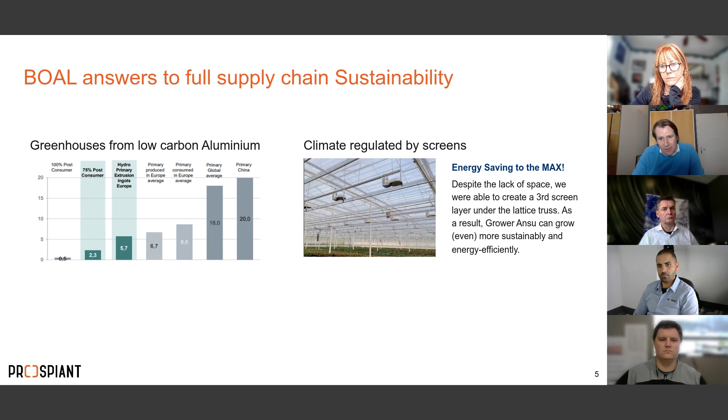That's from the aluminum perspective, but from the perspective of a grower, energy is costly, and we try to see how we can change that. For example, where growers start with one screen, it's very common in the Netherlands to have a second screen, but now we're already talking about growers who have 3 screens, and by that they are really lowering their energy consumption. If you go to the next screen.

But also getting the pesticides out, which is a challenge. We have our netting system, but people will say the netting system also has some disadvantages. So we're really looking at a way and a type of growing how we can overcome these disadvantages and get it growing in such a way that with the netting and without pesticides we have a really good yield.

So those options and this way of thinking really gets you to a position where every time you say, hey, where can I improve? How can I provide to my customer? Prospiant is one of our biggest customers, a good product which really is sustainable. Traditionally we use glass, but you also have ETFE foil, and that really reduces, for example, transport emissions. So we've been looking into that, and we think within a year we'll have a greener option for every product, which we can give to the market. So in that perspective, that's looking at where we can improve.

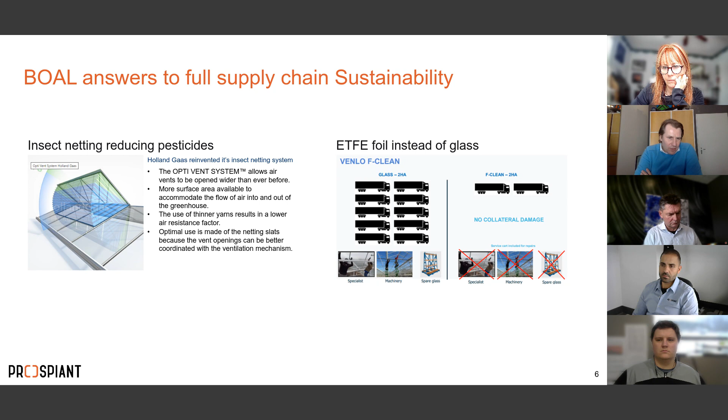How can we make the tomato or the cucumber more and more sustainable as well. That's our challenge, and also for all other things we're looking into, for example recycled input. We've got screens where we have recycled input without compromising the quality and functionality of the product, because that's really important. We also have our sandwich panels, designed so that no sealant is required. In that way, BOAL tries to, bit by bit, get the complete horticulture business more sustainable from its side.

So we really see this as the future in horticulture, that not only the product is sustainable, but also the greenhouses are. So if you've got any questions on it, I'm happy to answer.

And what you'll see is that more and more this is common practice. Like Nike has sneakers with recycled input, and also large car manufacturers do the seats, etc., with recycled input. So we believe that this will be the normal way of working in 5 to 10 years, that all products, or probably governments, will require a certain amount of recycled input in your products.

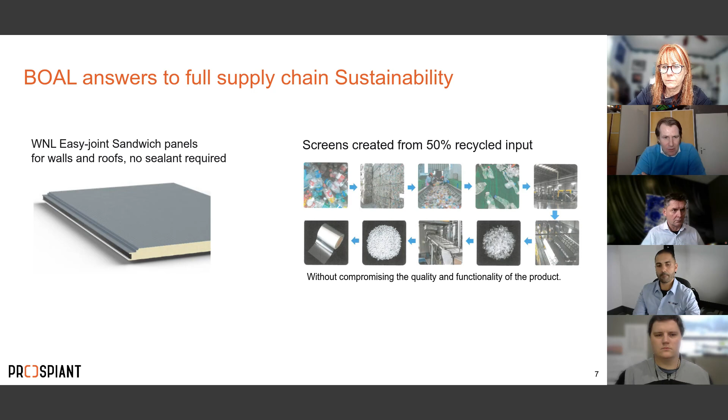So moving on to specifics about the actual greenhouse, we have Joe, who's going to speak to the next two slides. On a large-scale greenhouse project, you require what we call stormwater management or rainwater management. Essentially, when you have a large square footage of ground covered, you're going to have rain runoff from the roof when it rains in the area. So you have to control discharge into the local authority or the municipal drain.

And this water can get up, on a large scale project, to over 20 million liters of storage required. And then with water conservation in mind, it comes to mind, well, how can we use this water? How can we take advantage of this excess water? And that kind of leads into what we call a rainwater recapture system.

You can do this a couple ways. Typically how it's seen is you have a pumping station connecting to your stormwater pond, where the water will be filtered, sterilized, and then reused in the fertigation process. And then to further increase water quality in your pond, you can actually add a liner to your pond or cover your pond, and that'll control algae bloom as well.

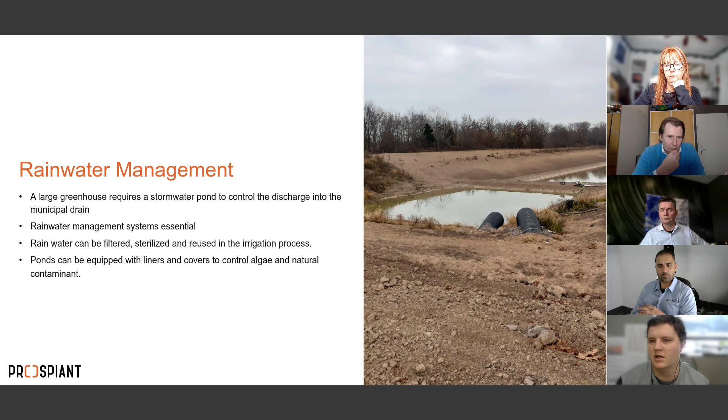And after talking about what happens to the water outside of the greenhouse, we also have to consider what happens to the water inside the greenhouse. Typically how that system is set up is you have fresh water, which in a typical greenhouse you can see up to 40,000 liters required per acre, which is quite substantial. So supplementing that fresh water that you need with the rainwater is obviously ideal.

In the typical process, the fresh water will feed a fertigation or injector unit, where that fertilized water is then transported to your plants through a drip irrigation system. The hydroponic gutter will collect what we call leachate after it's run through your plants. With that collected leachate, we pump it back through a particulate filter, then we can sterilize it and reuse it in that process, which can supplement your freshwater consumption and your fertilizer consumption, which is ideal for most growers.

So once the water comes in, it's a closed loop system, effectively. Exactly, essentially, yeah, so you can reuse both fertilizer and water.

So then it becomes kind of a combined venture with the fresh water and the sterilized leachate.

How many gallons are required per square foot? The freshwater consumption can be up to 40,000 liters per acre, but it usually doesn't exceed that number. Which is quite a high number, really. Yep, but if you consider the rainwater runoff, where you can see up to 20 million liters stored, you can see how it would be ideal to reuse that in the process.

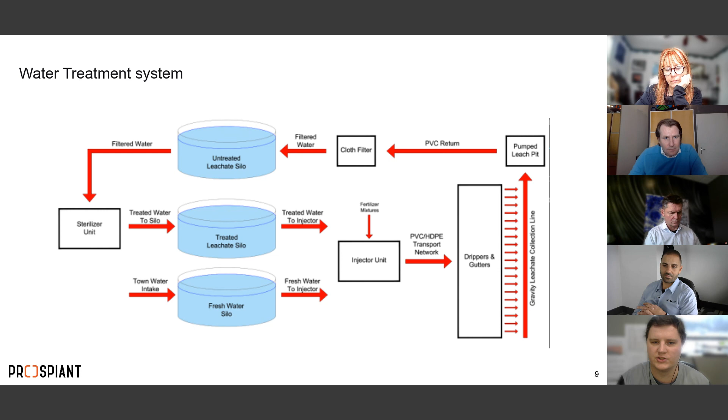And it's something that we've been exploring, and we've seen and done on a couple large scale projects, and it works very well.

On top of water, plants also require CO2, which is a very essential process in photosynthesis. To produce this CO2 in a large scale venture, you usually see it done via natural gas boilers. The issue arises when you need CO2 but you don't need heat, because when you run those boilers, you produce both heat and CO2.

So what we've done is we typically install a hot water storage tank on these projects. This allows us to produce our CO2, and then that heat, the hot water byproduct, you can store into a hot water storage tank, which can be used later when it's required. And since it's an insulated tank, it'll retain that heat a lot better. And how you can reuse that heat is by running it back through your boilers, where it requires less energy to get to the temperature required, or you can pump it directly to your range and use the heated water in your hydronic heat system.

What temperature does it store at? Typically 90 degrees Celsius, just around there. You can go a little bit hotter, but that's typically where you see it.

The key takeaway here is that the crop itself wants CO2. When the sun's out and the plant is wanting to be active, that CO2 uptake bursts from a photosynthesis perspective. So running your boilers to create hot water during the day isn't needed to keep the greenhouse warm, because it's warm outside and the greenhouse is already warm.

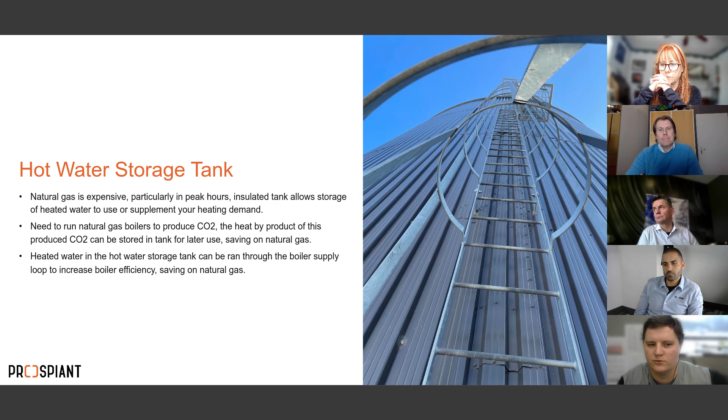That leads into the next topic, the CO2 collector. Essentially what we do here is set up an aluminum manifold that spans and connects to a CO2 condenser on the natural gas boiler. The CO2 condenser is there purely to increase the efficiency of the boiler, taking advantage of the flue gas heat.

But what this manifold lets you do is only need to run one boiler to produce CO2. So when you have times where your heat demand isn't in full flux but you have a CO2 demand, you can run a single boiler. It's not producing as much heat, but it is producing the CO2. On this manifold you have multiple CO2 blowers, used to distribute the CO2 into the range. So one boiler can feed multiple CO2 blowers, without producing as much waste heat going to the hot water storage tank for later use.

Are all greenhouses sustainable to some degree right now, or do some just have nothing? This is a general question, really.

Typically you do see some technologies that are green or taking advantage of what's there, especially when it's both economical and environmental, because it's a win-win situation. For example, a CO2 collector, if you have multiple boilers and blowers, is a great idea to have in. It's nice and green. You don't have to consume as much natural gas to produce your CO2. Same with the hot water storage tank, where you can produce CO2 without worrying about wasting your heat, where it's both economical and environmental for the grower and the operator of the facility.

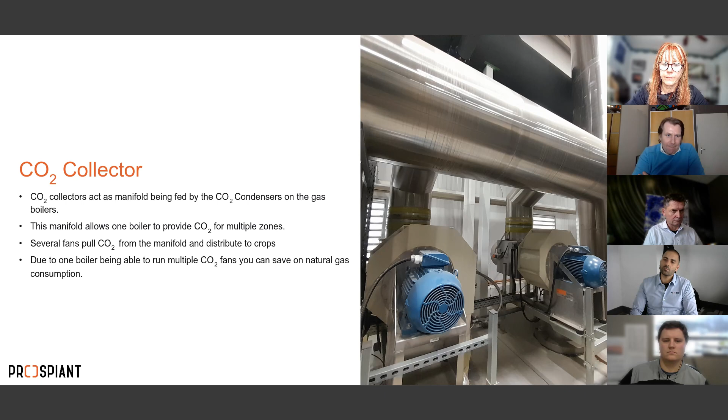Okay, my turn. So we talk about screening systems. We talk about shade systems. So climate screens, essentially we use them in a greenhouse to control humidity, temperature, and UV radiation. And the point of it is basically making the most optimal condition for you to have better production and have a better environment in your greenhouse.

At the end of the day, you have plants inside of a farm, inside of a structure. They are living, they have a purpose, they want to make fruit, they want to get as much sun as they can, they want to produce. So using a climate screen or a climate screen system enables you to truly make a very optimal environment for your plants.

So we use a screen system to basically move those screens, or to move the screening material, back and forth. So extending and retracting those screens. And with that screen system, you get control of the environment throughout the day and the night, which enables you to have a better grip of what you want for your farm.

One of the biggest and most popular ones that we use is an energy screen. An energy screen reduces the heating cost because, taking it a step back, we build a structure. You take a steel frame, you make a structure out of that frame. We cover it in either glass or polycarbonate, or, as touched on before, foil now, which is new technology coming to the industry. And once you do that, you have a closed building essentially.

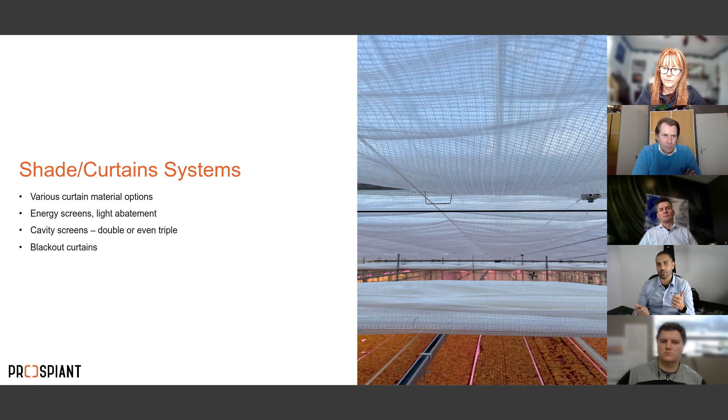Next screen, please, or next slide, sorry.

So instead of having that one open peak where that air can be mixed, and when you open your curtains, that air comes down, having smaller sections by putting these air baffles in makes it much more manageable and doesn't allow for that gradient to exist.

It's more uniform. So it's things like this that bring that temperature, that environment to where you want it to ideally be. So we're lucky in the sense that greenhouses have evolved, and they've evolved relatively quickly. Like Burk had touched on, where there's large footprints and large amounts of greenhouses, the biggest from a high-tech developed commercial production perspective is in Holland, with our colleagues here at BOAL. And then second to that is this Leamington, Kingsville, Southwestern Ontario area, where there are a lot of greenhouses that are tried, tested, and true.

The good thing is with these greenhouses and the need for them, the evolution and the technology has been amazing. To touch on some of the stuff my colleagues talked about, we're literally bringing water and nutrients right to the plant itself and letting that plant take what it wants and what it needs. What it doesn't want and doesn't need, we collect all of it. We bring it back into a closed loop system where we remove sediment, then we clean, we sterilize, and then we reuse that water when we feed the next time. So it's a closed loop system where nothing goes to waste.

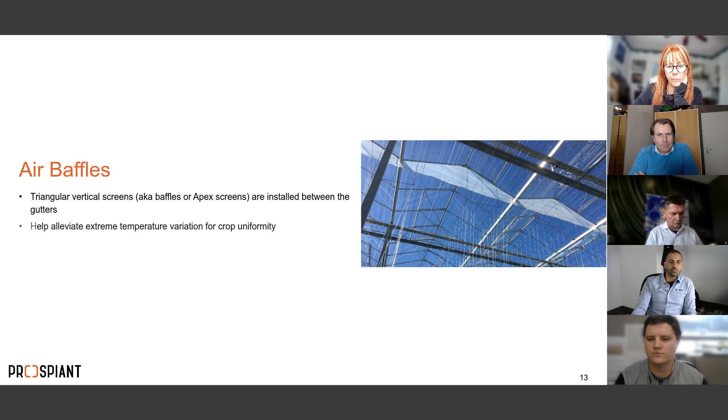Thank you. I think I messed up on the slide deck, and the next one is the same. So yes, ignore that slide. No problem. I also spelled Stefan's name wrong, so I had to fix that at the last minute. All right. We're at the end of the slide deck.